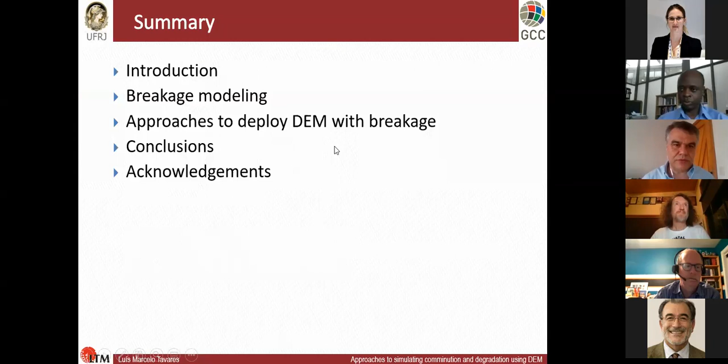I think in this crowd there's definitely very little doubt that people recognize DEM did a fantastic work for us in process industries. I'd say it definitely allowed us to open the black box. Before we couldn't look inside the machine, now we can look, at least in the virtual machine, at what's going on there. And I think DEM, over these last 30 years, has evolved to a level where you can choose whatever platform you want, open source or commercial packages.

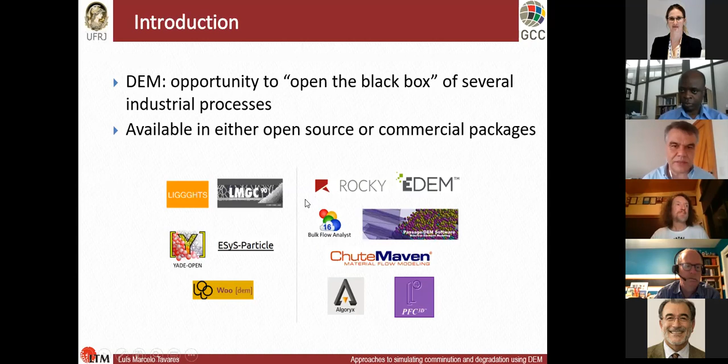There's plenty out there, as well as some in-house codes. Indeed, when you look at some things such as chute design during materials handling, or maybe closer to home, mill liner design considering projection of charge, there is little doubt that DEM is already an engineering tool. A lot of those are designed every day throughout the world and checked using DEM just to make sure things are already functional. So we want to go to this level in comminution and degradation during handling, but it's still something that is work in progress. We still are working towards this direction, and the challenge, I believe, is the difficulty of describing breakage in the DEM environment, as we will discuss during this presentation.

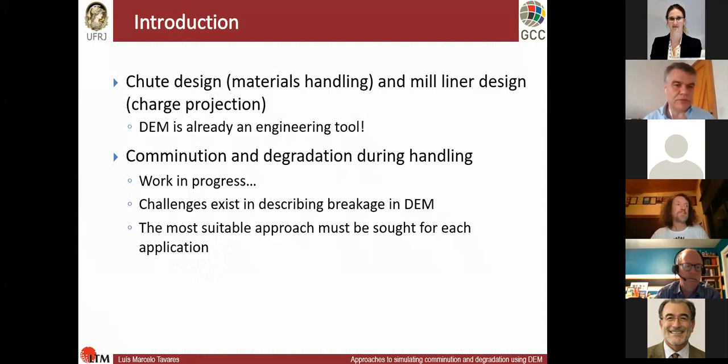So my provocation here is that, in order to do this, we have to look very carefully at what is the best way to couple these technologies, these tools, together.

So breakage modeling, as Malcolm introduced, is in my opinion quite at the heart of the success of this venture. There's no shortage of breakage models or breakage equations in the literature. Over 100 years of research on that.

Our vision is that the only sustainable way to really couple breakage to DEM is to look at individuals, understand what happens at each individual particle. It's really the best way to use DEM, because indeed the best thing we can do with DEM is actually describe not averages but individuals, and that applies to the environment, to the machine, to the device, but also to the particles.

There's little sense in actually using the richness of information from DEM if you're just relying on average characteristics of particles and tracking averages of the population. The nice thing here is to be able to have as much information about both.

In order to do a good job coupling DEM and breakage models, I think some requirements are important. In my opinion, the models should be detailed enough to describe breakage, but they shouldn't be overly complex. We should remember there's little success in describing fantastically well a single particle if you cannot really put hundreds, thousands, even millions of particles in your simulation. So you have to avoid too much complexity or computing effort.

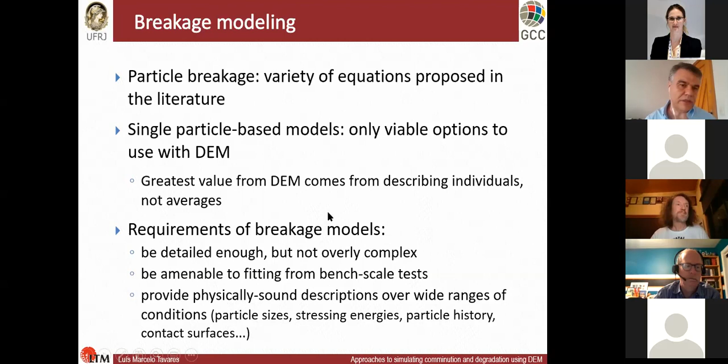Particle history is important here, being able to keep track of what's going on with the particle, and also the fact that sometimes particles hit each other, sometimes they hit different surfaces, and that surface, as far as comminution is concerned, will have a major role. So these are all things I think are key in being able to successfully model breakage.

Over 25 years ago, I started at University of Utah, and as part of my PhD, some really good work was being done there. I pretty much hijacked some of that to Rio when I started 23 years ago in Rio.

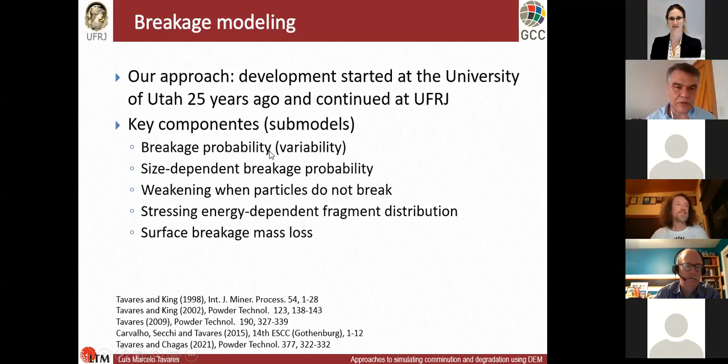The idea is that I started building the blocks of each of the components I thought were important to be able to describe breakage, from individual particles to an environment. I call these submodels, and we've been busy publishing and validating each of these using data from testing. So I'll go through each of these in a little more detail in the next slide.

The second part of the story is if you look at the breakage median value, that's the 50% probability value, the specific energy required to do that, which is the fracture energy or median fracture energy. If you look at how this value changes with particle size, it changes in a very particular way for each material.

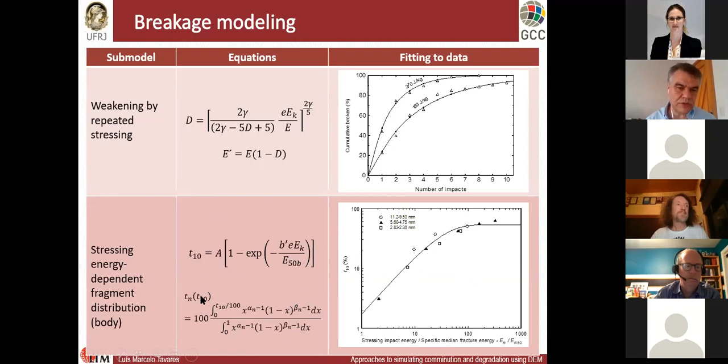On top of that, we create the full size distribution from each event using the incomplete beta function, which also served us well. The very last piece of the puzzle to describe what's going on with a particle in every single event is the surface breakage mass loss, or attrition loss.

It's described using this simple expression, where the amount of material lost is a function of a material parameter, particle size, and the specific impact energy.

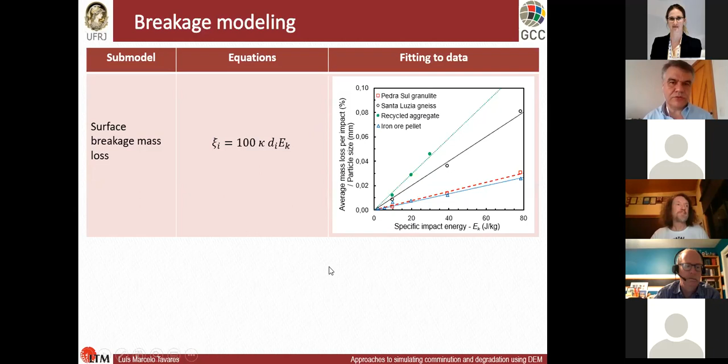This model area is very tough to deal with — surface breakage, attrition, chipping — and we know it's very dependent on particle shape and so on. I'd say that amongst all the models, this is the latest and most immature, but it still contributes to explaining what's going on with particles under very low stressing conditions.

How do we go about defining constants in those equations and fitting parameters in those single particle models? The most favored approach is to look at single particle breakage tests. You can see here the impact load cell device originally proposed at the University of Utah.

There's a number of these around the world — here in Rio, at the JK, in Iran, and other places. This is nice when you want to reproduce conditions found in most comminution machines, at low to relatively medium velocities.

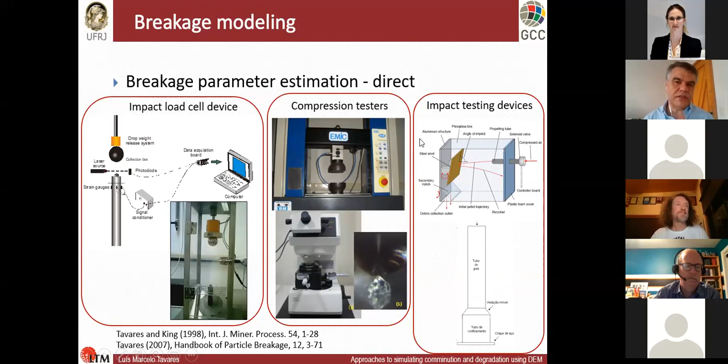If you're dealing with conditions like impact crushing, or want to mimic what happens during ship loading or materials handling, you can use one of many impact testing systems, propelling particles against a target at different angles and analyzing the debris, counting the number of broken particles. In materials handling, some materials are quite brittle, so you can even do simple drop-by-gravity tests and analyze the results. There's a number of direct ways to measure those parameters.

But in some conditions we have to rely on indirect measurements. For instance, Grant and Malcolm did some very nice work a few years back using Erlang's Schönert's impact device, as well as JKRBT, to generate data describing how a particle's response varies over quite a range of particle sizes. Using data they generated and our modeling approach, we could demonstrate that we could fit the data very nicely over quite a range of different sizes.

The key part of our model is exactly how the median fracture energy changes with particle size.

Another, more indirect approach is to use batch grinding tests we do in the lab, either in a ball mill or a stirred mill, and then rely on the validity of the batch grinding mechanistic model I'll show in a few minutes. We can back-calculate some of the material characteristics. In this case, this is the limestone data. We've been publishing on this, demonstrating that, within the limitations, it is a valid approach, but it's a way to still get meaningful model breakage parameters to use in the different downstream approaches.

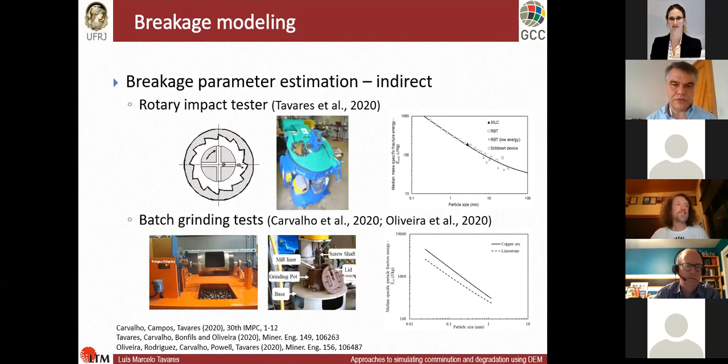But it's important to bear in mind that the model has limitations. Some of these relate to strain rate effects. We know some materials exhibit strain rate effects, and we still don't quite fully understand the relationship between material composition, texture, and strain rate effects. So that's not explicitly in the model. What we suggest is to do testing under conditions closer to your device and strain rate range. The other thing is particle shape.

We know particle shape has a very significant effect on breakage. So far we assume particles tested have the same shape range you see in practice, but this really imposes a challenge in particle preparation during testing. That's an area that can benefit from further research in breakage modeling.

Loading mode also matters for some materials - whether you're stressed by hitting against a target, or loaded like in two-point compression, there are differences. These aren't quite clear in the literature, so our model is insensitive to that. That's another area. And also composite particles.

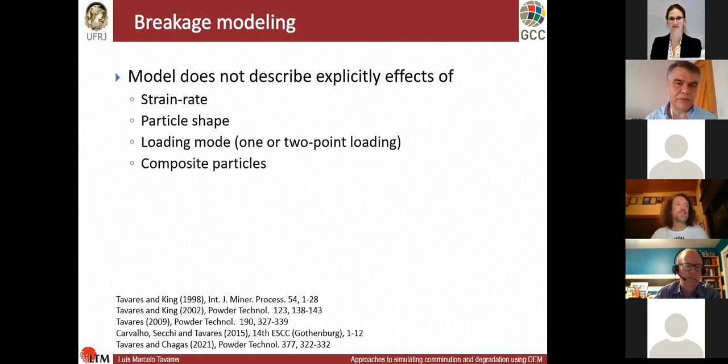We assume particles have their variability, but we don't really know exactly which component inside the particle is responsible for the strength and so on. So the behavior of composite particles is something we don't yet understand, but it's really key in liberation. Bearing those limitations in mind, we still thought that now we have a model good enough to do some good work for us in degradation during handling and comminution.

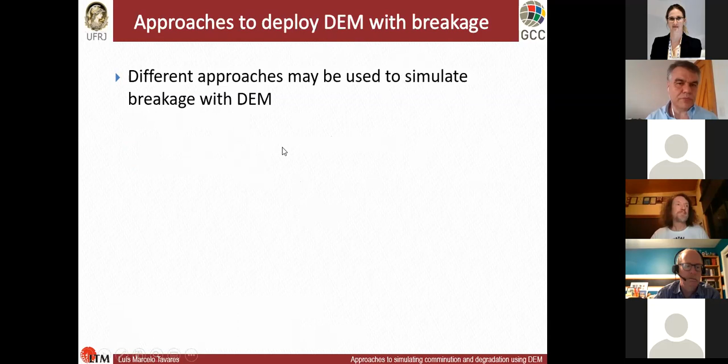So we want to deploy this breakage model in simulation. How do we do that? To illustrate, I'd like to show this table with, in my opinion, at least four different approaches we can use. We'll go through it in the next few minutes.

The first approach is to break particles in DEM using collision history information. This is the simplest approach - you consider the discrete particles, track the individual particles, and predict what happens to each one. Basically it's a post-processing of information from DEM that we use to get the collision history.

And then afterwards we predict what happens with the breakage. The other approach, also looking at discrete particles, and the most intuitive one, is the breakage embedded in DEM.

So DEM in this case encompasses what is going on throughout the whole process. It's used to calculate the stressing energies, describe each collision, but also as soon as a particle breaks, it replaces it by fragments and so on. This is the one we'll talk about quite a bit.

The third approach goes into a continuous distribution. It recognizes that for some media mills, there's no use trying to describe each individual particle—you have billions and billions of particles. In this case, we want to use what we call one-way DEM-PBM coupling population balance model, which is basically running DEM simulations and then getting information on the collision spectra, typically of media mills.

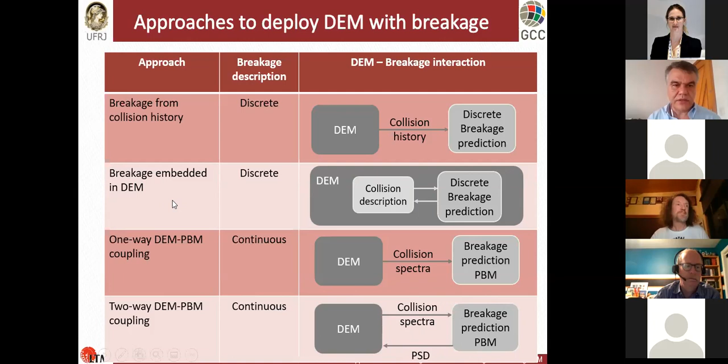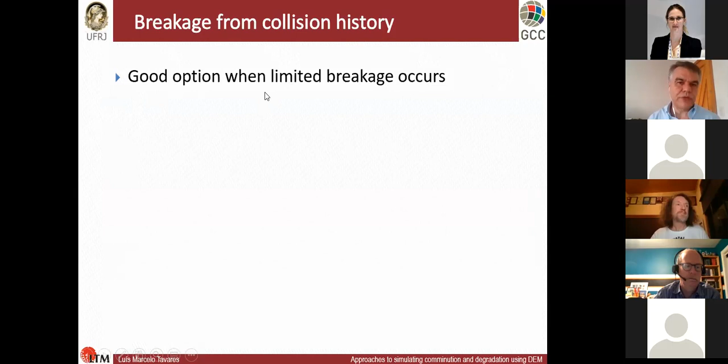So looking at the very first one: breakage from collision history. I think it's a very good option when you have very limited breakage in your process. Just explaining briefly, this would mean you run your DEM simulation assuming that particles don't break. It's the easiest way to go.

That's pretty much the standard outcome of a DEM simulation. But then you keep track of several particles looking at their collision history. Now with this information, after the simulation is finished, you can go to your own code and start to look at these histories of these virtual particles and understand what would happen as far as breakage if these particles would be simulated.

So in this case, for instance, the first outcome is: what if the stressing energy in one of those collisions is lower than the fracture energy of the particle? We know from our breakage models that the particle probably suffered surface breakage and may have been damaged. So there's mass loss here, fragments generated, also a reduction in fracture energy for the next time step or next event.

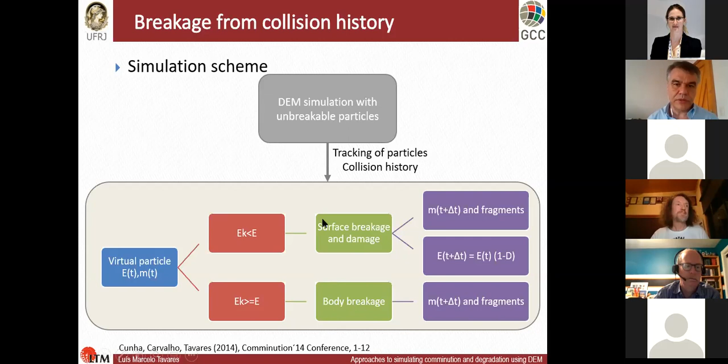Now you go to the next impact event on this same particle. Maybe the stressing energy is higher than the actual fracture energy of the particle. In this case, the model allows you to predict the body breakage and then the size distribution of the fragments. So it is, of course, a limited approach when you have a lot of breakage, because the simulation doesn't consider that particles would be broken. But it's really a very powerful scheme when you have fairly limited breakage.

So to illustrate this, pushing almost to the limit of the validity of this approach, we applied it to a VSI crusher in a particular application here in Brazil, producing artificial sand from crushed rock. So this is one VSI crusher.

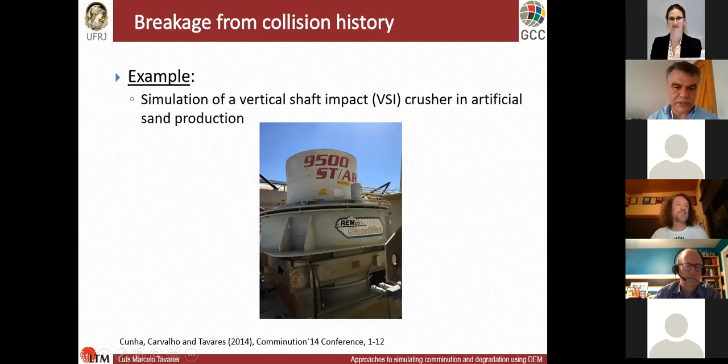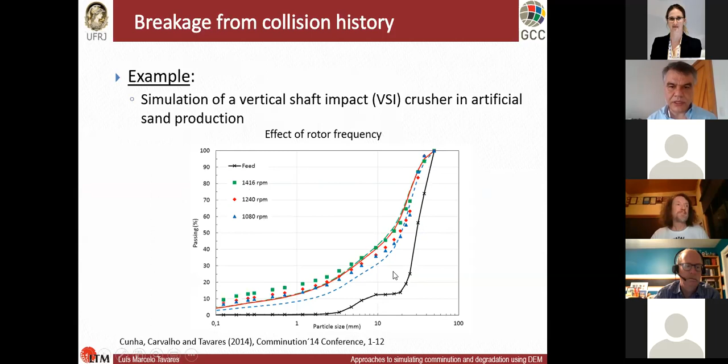What you can see here is the typical particle size distribution—the feed and the size distribution of the product, discharge of a full industrial crusher. You can see here the effect of increasing the rotor frequency from 1,000 to 1,400 RPM. And you can see the data points as well as the model are quite reasonable in the sense of increasing fineness as you increase the vigor of the impact.

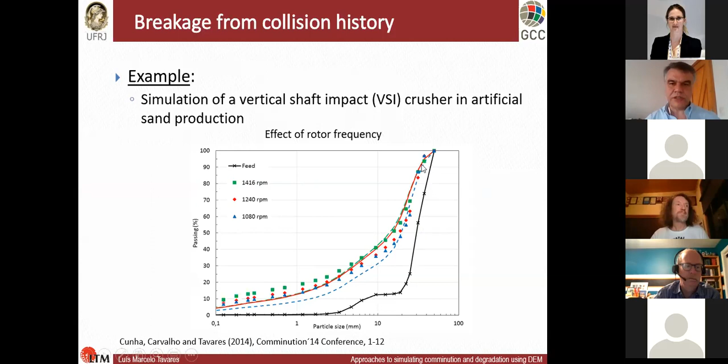And also showing here the typical thing we see in VSI, that a lot of particles actually barely break. This size reduction is certainly the smallest amongst all comminution equipment. So it is, of course, just at the limit of applicability of this approach, but still served us well in a simulation involving millions of particles, as you saw. So this is one approach that could be considered. Indeed, as a limitation, it really provides an unrealistic description if particles suffer multiple breakage or severe body breakage events.

And the other thing is, of course, it's not packaged anywhere, so you really have to build your own code or look for somebody to do that for you. But it's important that we've been very successful simulating materials handling operations using this tool, because when you do materials handling, especially loading in a silo or loading in a blast furnace, you can have millions and millions of particles. It'd be a lot of effort to actually predict breakage in real time with DEM there, putting a lot of overhead in your simulation. So one thing you could do is just run the simulation as you would without breakage, and then look at a few tracked particles to see what happens. This has been very useful for materials handling and a number of applications.

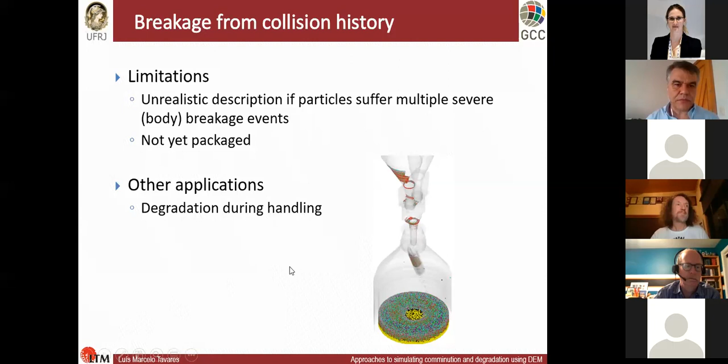Well, of course, the most intuitive approach when you're talking about coupling breakage in DEM is actually putting particles breaking in real time inside the DEM environment. And indeed, I think that's the only option you should consider if you are predicting a crusher with flow restrictions, like a compression crusher, jaw crusher, or cone crusher. In that case, there are a couple of options you should consider. We are quite familiar with some of them. For instance, we can deploy this breakage with at least two major types of approaches.

The first one is the approach in which the fragments are resolved throughout the whole simulation, so I call this the fully resolved fragment approach, as you can see in the scheme on the right. For instance, for the bonded particle model, the fragments exist from the first moment you start the simulation. So you can appreciate that the amount of energy, time and effort in the computer there is quite significant, because you have to keep track of every individual fragment even before they are actually created in the simulation.

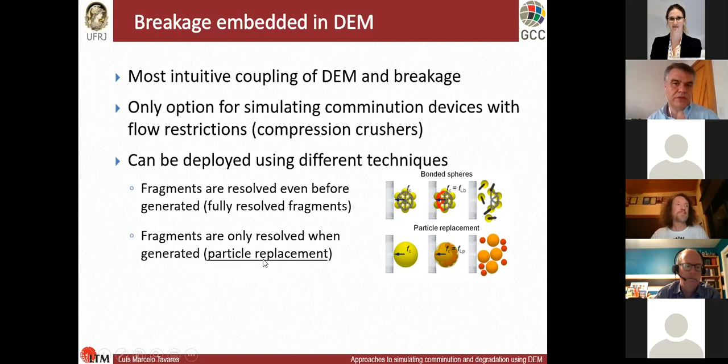And then there's what we call particle replacement, schematically shown here on the right. You only care about the fragments when they are actually created. This is exactly the approach that we favor, because it's more amenable to be deployed with large simulations. So this instantaneous breakage approach is one where fragments only appear when you need them, and the particle is replaced by the fragments only when a given criterion is met. As I mentioned, it's far less computationally intensive than the other alternatives, which is why we pursue that path.

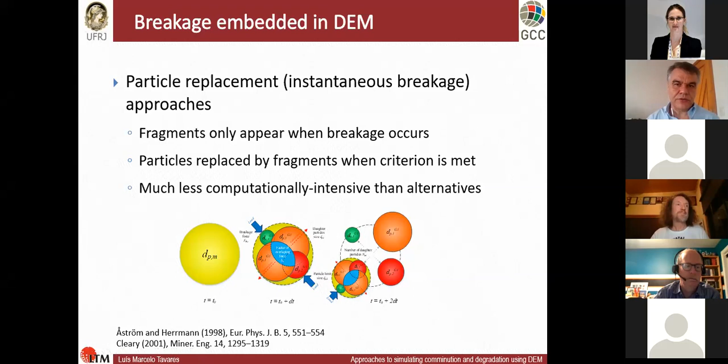So what did we do? We were quite happy with the approaches we put together, and we were very happy to be approached by the two major software developers for commercial DEM - Rocky, ESSS, and DEM Solutions, now Altair - who wanted to have our model input into their platform. More than a year ago, we input into Rocky the version for polyhedral particles, and in EDEM we just recently input the version for spherical particles. So both are working already if you have licenses for either one.

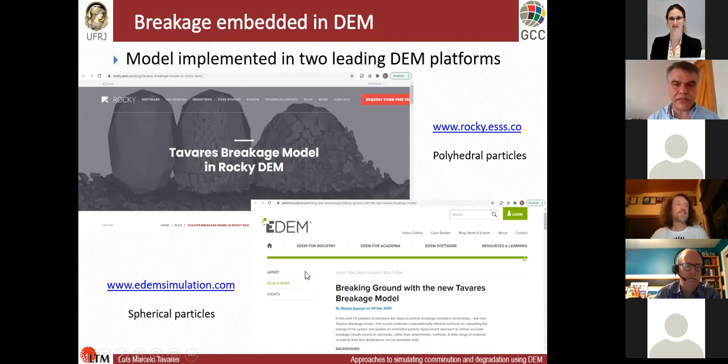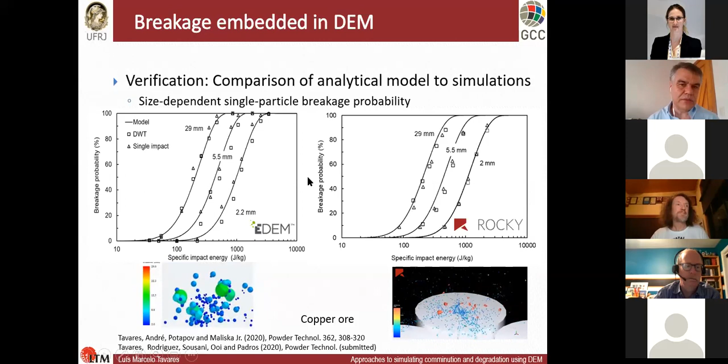You can see the illustration here - that's in EDEM for spherical particles, and on the right you see exactly the same thing for polyhedra. Sometimes a small effect from single to double impact appears, but that's not really accounted for in the model. The second part of the puzzle here refers to the weakening, which is basically accounting for the fact that particles, when they're hit over and over again, become progressively weaker.

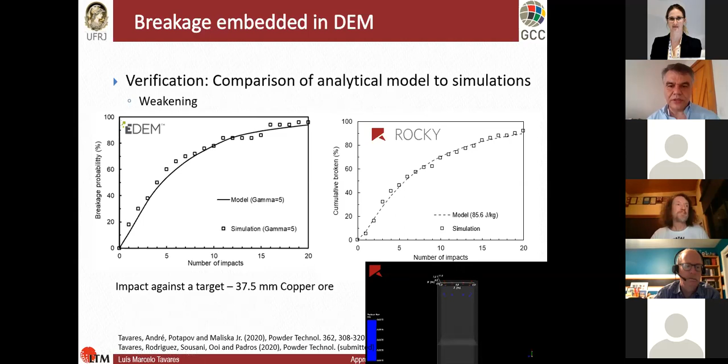Even at the same stressing energy, particles eventually break at a very low impact energy. This is characterized by a single model parameter, gamma. You can see here, both in EDEM and Rocky, that it really captures nicely the progression of particle breakage. Here on the bottom, you can see a simulation in Rocky showing the progressive breakage of particles when they're hit, leading them to drop.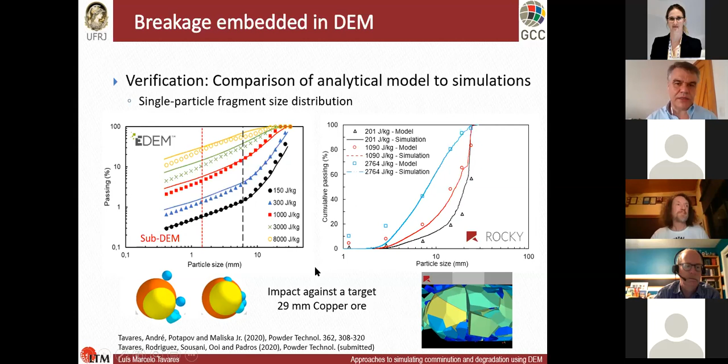This gives us a lot of confidence that we can do a good job starting to apply to real situations in comminution. Perhaps the simplest situation we can find in comminution is just dropping a particle on a bed, a steel ball on a monolayer bed of copper ores. You can see here, this on the left is just a comparison now, symbols represent the experimental data and the lines the simulation.

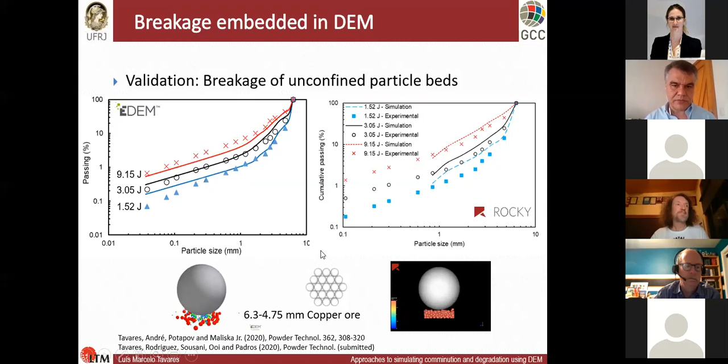This shows very nicely that increasing the impact energy of this ball, typically by raising it to a higher height, increases the fineness. So qualitatively and quantitatively, giving a very nice fit here for EDEM and also for Rocky. They also pay attention to the fact that in EDEM, we could stand quite a lot below the minimum size of the fragment, which in this case is about 0.8 millimeters. This gives us some good high expectations when we apply to larger scale systems.

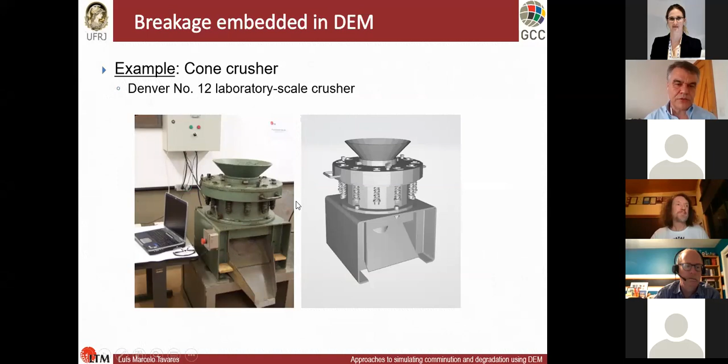Just a couple of examples here. Very recently, we have been running some of these simulations. This is a Denver type cone crusher we have in our lab. We have tested quite a few materials, so we ran simulations, for instance, for a copper ore here in the 22 to 16 millimeter size.

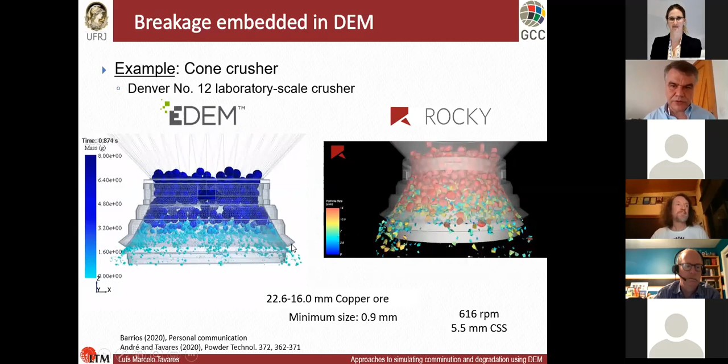We ran simulations now in EDEM using spheres, and in Rocky using polyhedra. The speed of simulation is quite different here, almost real time in Rocky, but quite slowed down in EDEM. Nevertheless, you can see very nicely the choke level being identified here, and then the fines leaving the machine. It looks quite lifelike what we have.

But more exciting even than in EDEM is the fact that we can actually predict the size distribution even well below the minimum size of particle that appears in the simulation, which you see here in the solid red line, in contrast to the size distribution measured from the test. This gives us confidence that in crushing, we can apply to some really interesting case studies.

We have done some industrial ones, but we didn't get clearance to present today.

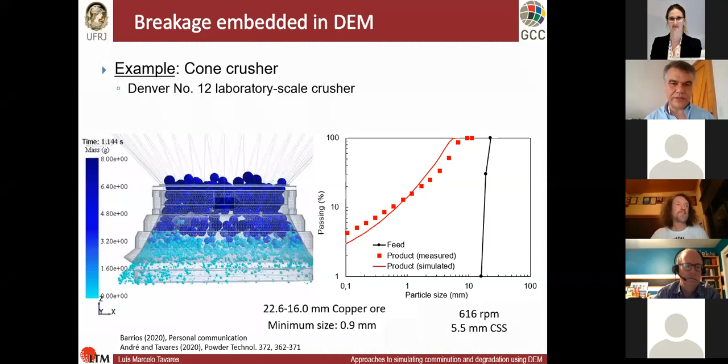So maybe the most challenging crusher type machine would be the HPGR. Quite a few of us are involved in that. The HPGR has the added complexity that you have one roll that is fixed, whereas the other one is movable and responds to the stresses in the bed.

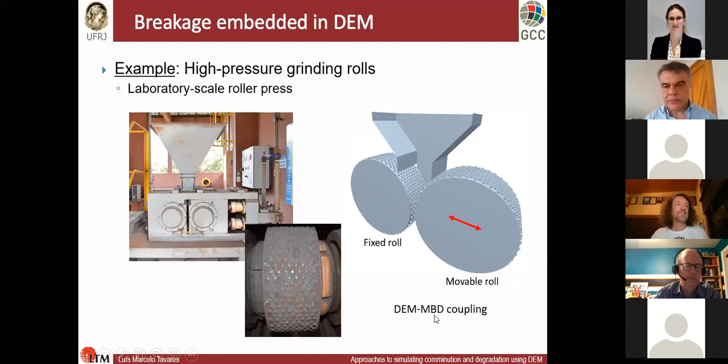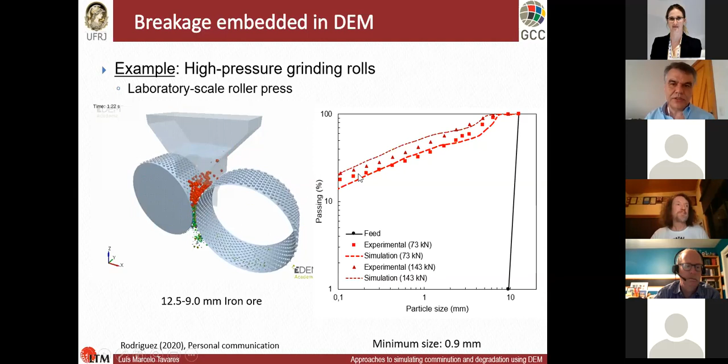But when you look at size distribution, I think it's quite exciting to see that when we raise the force from 73 kilonewtons to 143 in this small lab machine, we see an increase in fineness of the product, as is typical in HPGR, a lot of fines. The nice thing is that we could capture the increase in fineness in the simulation, given by the lines. So we're very excited to see the simulation telling us what we do see in an experiment in the lab.

Of course, there are still limitations to that. We're still in the early stages. For instance, particle shape, we know that influences breakage. Even though we could tailor-make the shape of a particle in Rocky, we have no control over the shape of fragments. So this is still an area that has to be addressed in the future. And of course, when we deal with spheres, there's no control whatsoever in that.

It's important to recognize that when you have major rebreakage going on, simulations will obviously require inputting very fine particles. So the tricks we use to generate the fines no longer become applicable, because those fines would have been broken over and over again.

One area for those who are very excited about DEM that is really worth looking at: when you talk about contact parameters, we mostly look at how unbreakable particles behave. But in comminution systems, particles change their size naturally, and so their flow properties will change. So we have to be a bit more careful than usual in selecting proper contact parameters.

Of course, this hasn't limited us to apply to comminution machines. We've been doing work on impact crushers, jaw crushers, roll crushers, and so on. And the most exciting thing, I'd say, is being able to go to novel crushing devices and test machines for things that aren't even in operation yet.

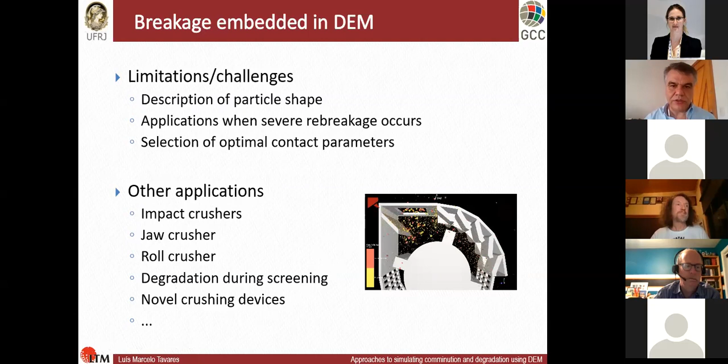So this is the first part, dealing with explicit particles, individual particles in a DEM simulation. But how do we go about simulating tumbling mills? Tumbling mills involve huge particle populations.

Just to illustrate how massive that is in a DEM simulation: for different mill types and diameters, starting from a 30 centimeter diameter mill, like a Bond mill, the number of particles you'd need to simulate the full mill is maybe a couple hundred, pretty straightforward. But as you increase the mill size to full industrial scale, just simulating media, you're talking about a couple hundred thousand particles, which is quite doable these days in any open source DEM code. But if you want to start including particles, just in the case of the Bond test, besides the media, just the 2.8 millimeter particles, which isn't a lot in a Bond test, you already increase the number of particles you have to deal with by two orders of magnitude.

If you're even greedier than that, including 0.5 millimeter particles and so on, you're definitely going into the billions and trillions of particles, which won't be feasible to simulate for quite a while, I believe. And this is only talking about particles that don't break. If you talk about breakage of these particles, it completely goes out of control.

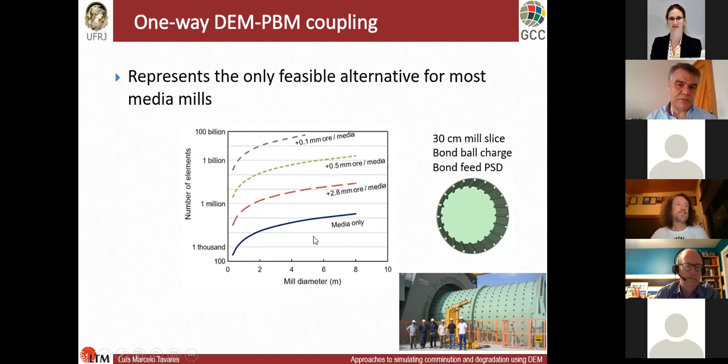So it really means that we need to, as much as possible, remain looking at how media behaves, because it's still doable, and be smart about coupling with breakage. We have to understand that to apply this, we must consider that only grinding media is transferring energy. But it's important to also realize that we should assume particles don't really create a lot of swelling in the ball charge. That applies if the particle size distribution is not too coarse.

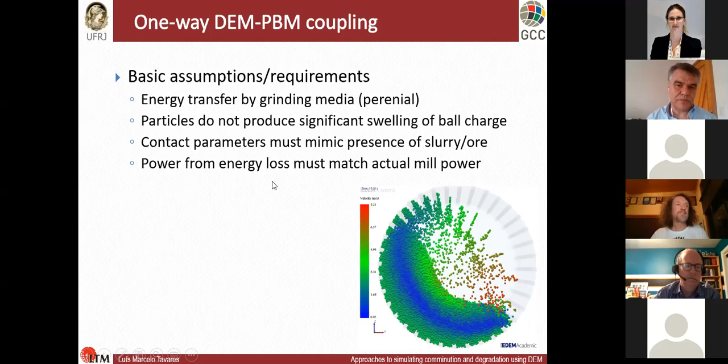It's important to also realize that the contact parameter selection is key here. We must be able to mimic with the contact parameters the presence of slurry or ore, and that really is different from the contact, for instance, for steel on steel. One of the resources we have to make sure we are in the realm of reality: we should be able to match the actual power in the machine with the power we simulate in the DEM, summing up the energy loss.

So with those caution notes, we have applied the scheme, which is slightly different from what you saw before. Now it's in a continuum. We use DEM simulation to get the collision energy spectrum, so we have data over quite a range of stressing energies. We have the same models we saw before giving a description of the micro scale events, but then it requires us to understand what happens between those grinding media collisions.

How much material is being captured? What is the size distribution of those particles? This lets us finally put in the population balance approach and what we call the fracture energy convolution, which accounts for the fact that when you hit particles, some of the weaker particles are broken, some of the tougher particles are weakened. So we have to mathematically account for all of those events.

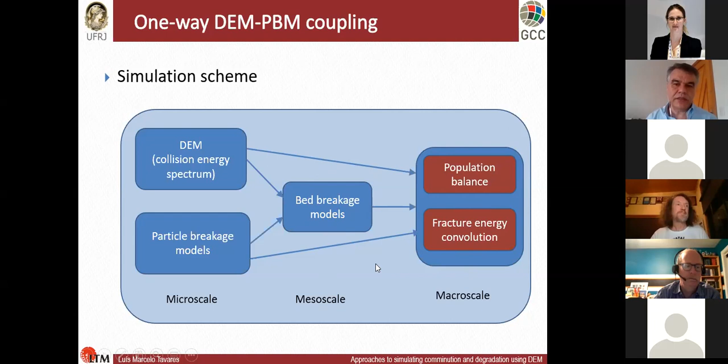Just for you to appreciate how this population balance formulation looks, if it's batch grinding, it looks more or less like this: the rate of change of particles in each class is a function of the frequency of the collisions from DEM, the mass of particles inside the mill, but also of disappearance and appearance components, accounting for both body breakage and surface breakage.

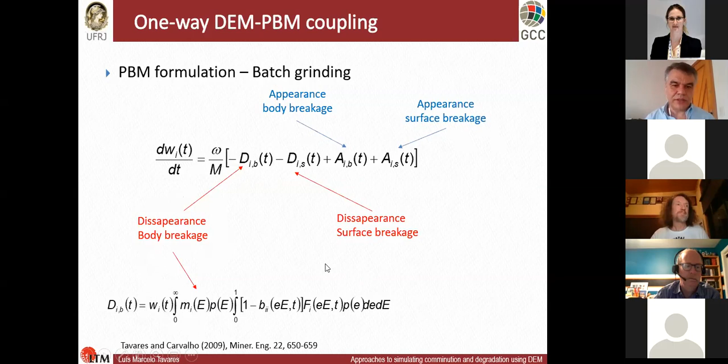Just for you to appreciate the level of complexity of what I'm talking about, we have to account in each of these terms for all of those micro processes: the amount of material captured, the frequency of collisions of a given magnitude, and the probability distribution or fracture energy distribution of material. So it's a lot of background modeling that goes in there to put these together in a continuum.

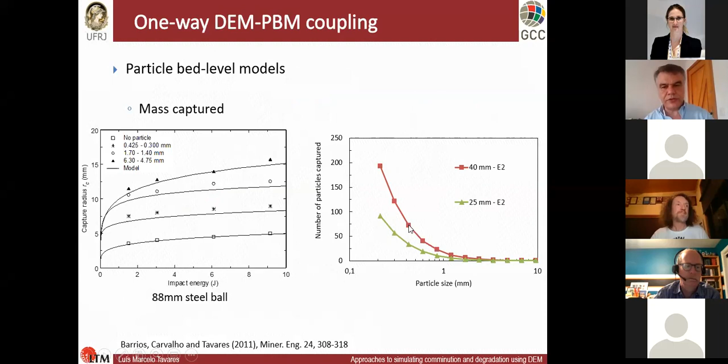One part of the model that I think is quite important is this mass capture. You can see that the amount of material captured in our model is a function of the diameter of the ball and the particle size, which gives us something we know: if you increase the ball size, you capture more material, but of course you have fewer balls for the same grinding charge. So these are all the pieces of the puzzle that we put together.

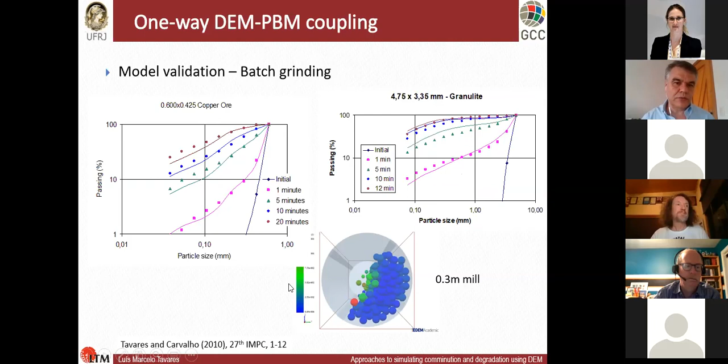We did validation on these some years ago, on different grinding conditions in batch mode, from fairly fine copper ore to relatively coarse rock. Fairly good agreement here, though in some cases it's not as good because we have difficulty getting good breakage parameters for the fines and so on.

But I think one way to show the validity of this approach is to show that it responds sensibly to variables we know are important in milling. For instance, the surface breakage rate: we know that if you use large balls, like 40 millimeter balls, in a small mill, the rates of breakage are quite low for fine particles, but you get the bonus of breaking the coarse material. If you move to smaller balls, like 15 millimeter balls, you definitely sacrifice breakage of the coarse in favor of being able to break fines much more efficiently.

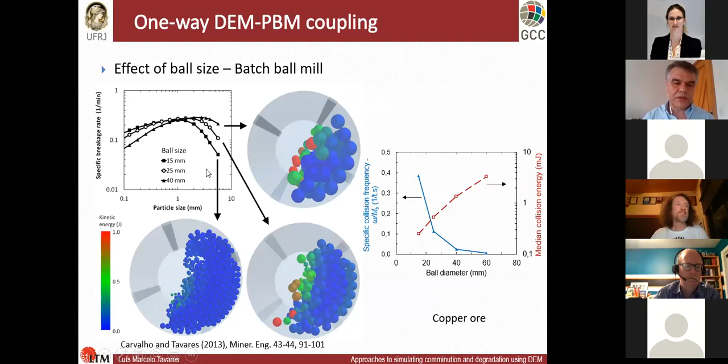This is a very nice material-dependent response that the model is already capturing nicely. Now going to other mill types, like a stirred mill or vertimill type machine, we know well that increasing the frequency of collisions increases the energy. But here in the model, you can see nicely that the specific breakage rates shift upwards as you do that, from prediction using a model. So this is something we're very excited about, the ability to represent what we've seen through experiments using the mechanistic model.

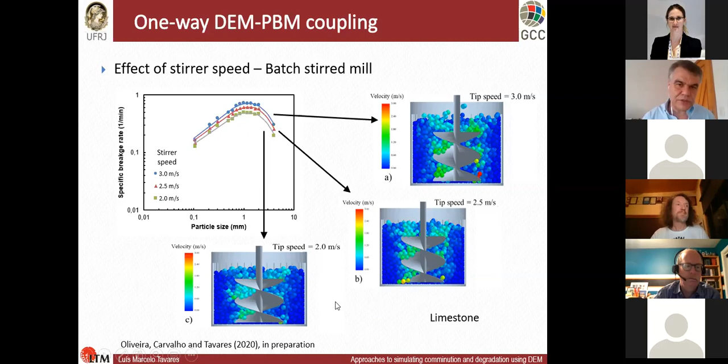In industry, we don't operate things batch, they are continuous. If you want the full dynamic solution, it gets quite complex, with major integral differential equations. But we wanted a simpler solution. So instead of looking at dynamics, looking at steady state, we could use a simpler solution using batch grinding data as well as residence time distribution.

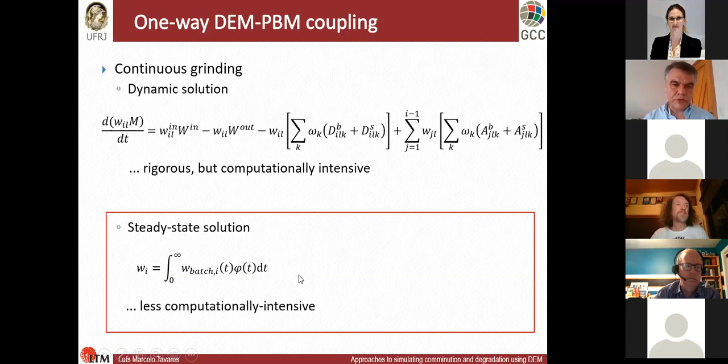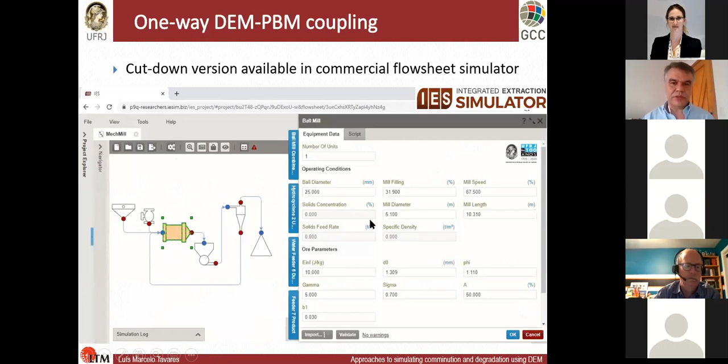Using this solution, we could go into a commercial simulation platform, which has been a dream of ours for a long time, to put a DEM-based breakage model into a simulator. This we have done in IES. You can see here our ball mill model with the classifier, and then you can use it to predict in IES in any circuit you like.

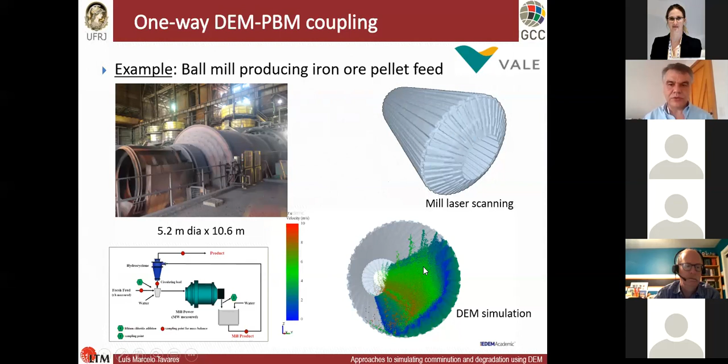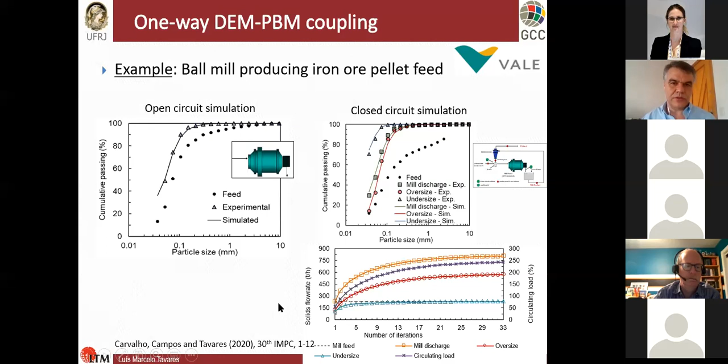It takes a while to solve all those equations, but it converges and gives us the full circuit response. Of course, there are still limitations. We still know relatively little about the role of slurry, especially on breakage and particle capture, so we still need to improve, especially on the capture model. And characterization at fine sizes is a key challenge we need to address to apply these approaches. But that hasn't prevented us from looking at different mill types: stirred mills, planetary, and so on.

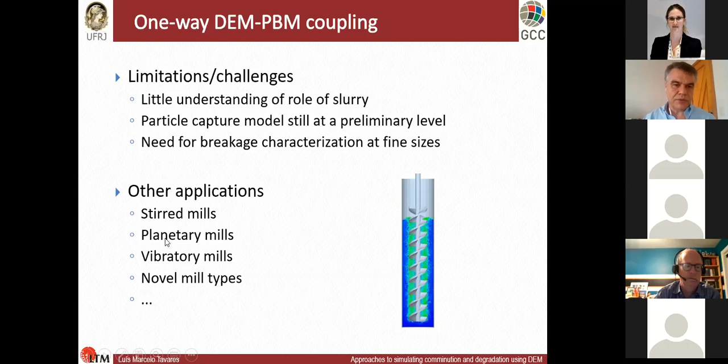The very final piece of the presentation is talking about this 2-way DEM-PBM coupling, because we do acknowledge that in some mills, for instance AG and SAG mills, the particles take an active role in energy transfer, so we cannot simply decouple the role of media and ore anymore. In this case, we could look at the approach of breaking particles inside DEM. We don't think that's an option for SAG mills, simply because it takes fairly long for the charge to stabilize. You're talking about a simulation that would have to take several minutes, and we still are running DEM simulations for seconds, not minutes, not hours at all.

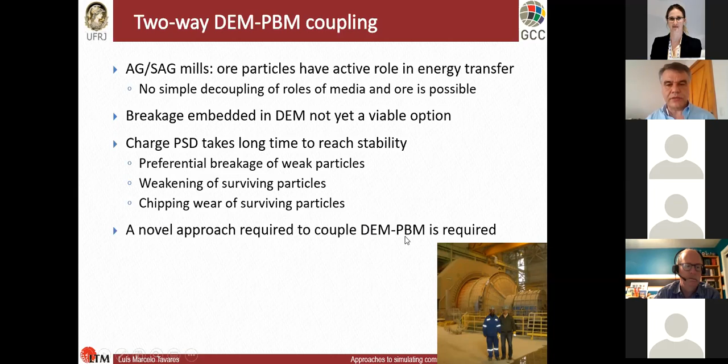So in order to do that, we need a new approach to couple DEM and population balance in a smart way. That was the PhD work of Rodrigo here from my group. The idea is essentially to start with the initial charge, doing a DEM simulation. After that, getting the collision energy spectrum, exactly as we do in ball mills, but then feeding it to a breakage model to predict if the charge has changed or not, or if only fines have been generated. If not much change has happened in the charge, you can just iterate the mechanistic mill model, assuming validity of the DEM simulation. On the other hand, as soon as the charge changes enough, you have to go back and redo a DEM simulation, and then go to the outside loop.

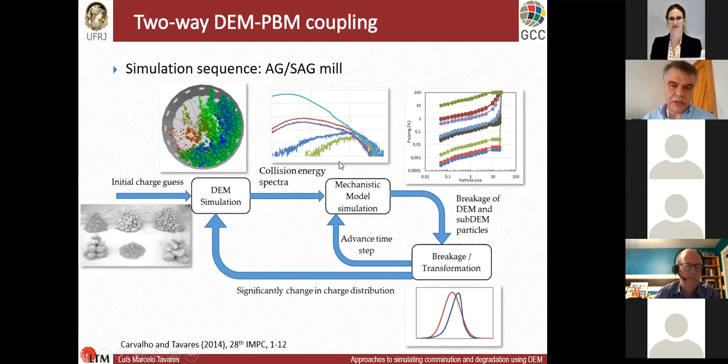We have done that for a couple of cases, but an important thing to recognize is that in a SAG or AG mill, you have the discharge grate that imposes a classifying effect. In this case, we have to use an assumed discharge function; we don't predict that.

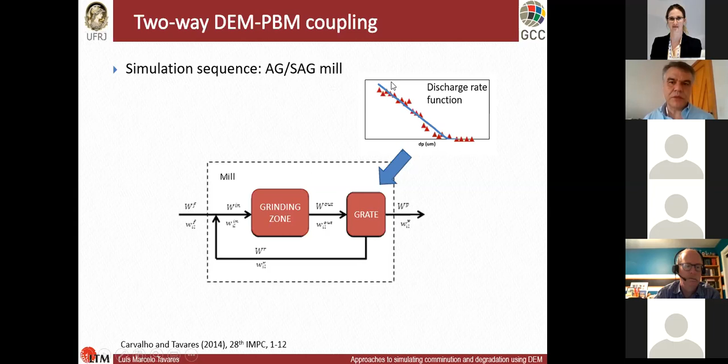It's from experiments or simulations using SPH that we need them, but we needed to assume that discharge function to be able to do the simulation.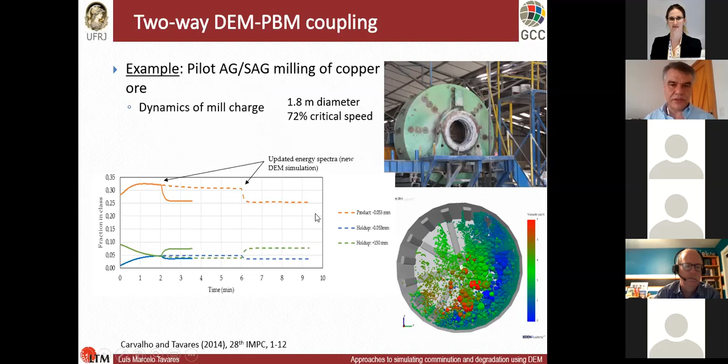So maybe after a few minutes, we could get full convergence, as you can see here. And the full convergence solutions are illustrated in this graph for the mill, the same conditions operating in SAG mode on the left and in AG mode on the right.

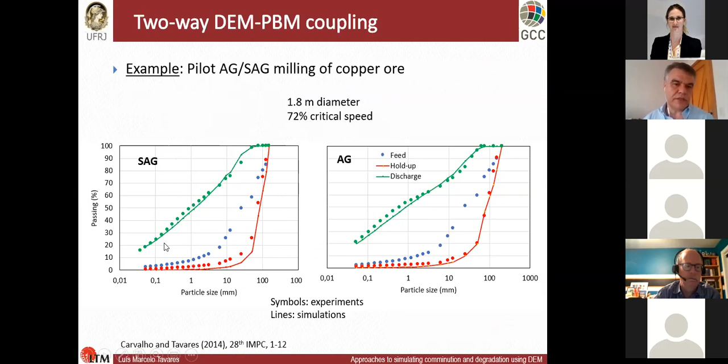You can very nicely see that the model could fit the data, predict the data. There's no fitting. And even further, showing that AG milling produced a bit more fines than SAG milling, as we already know from practice. So there's still a long way to go on this coupling approach.

It's still quite computation intensive. You require a discharge function, and it's not yet packaged. But there's definitely great opportunity to apply to pebble mills, run-of-mine mills, and so on.

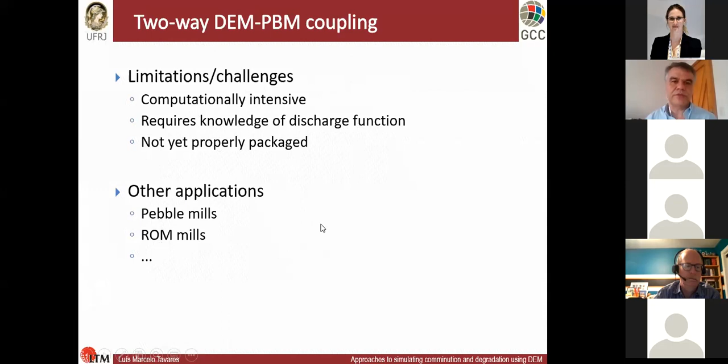So this really puts me into the final slide here. I think the take-home message I'd like you to take is that there's no one-size-fits-all solution to simulate comminution and degradation in DEM. You have to look for the best one.

And I think it's always good to remember that we're not in the animation business, and we should really seek the best fit for purpose solution, not the one that looks good, but one that works well.

I think breakage modeling has a central role in that. Our breakage model now is available in the major commercial DEM software platforms. We're very happy with that.

I think also we have been able to put our breakage model and the population balance model in IES to make room for more people to test the approach.

And as I said, I think AG and SAG mill still is a challenge, but I think that's probably one of the devices that can benefit the most from using this simulation, because the phenomenological models are definitely challenged if you have little data.

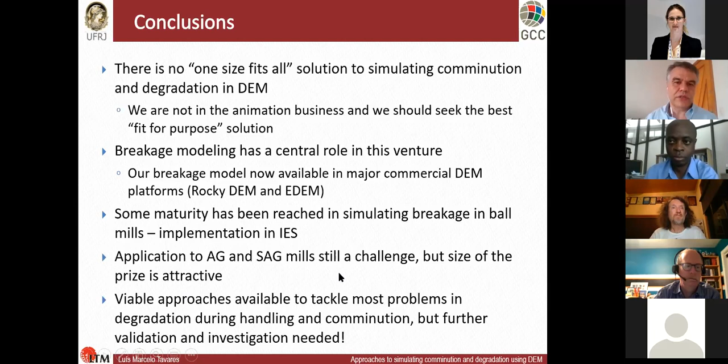And I think the final conclusion is that viable approaches are already available for most simple problems involving degradation during handling and comminution, but there's still work to be done in order to really make them a truly engineering tool. So I'd like to thank my whole team for all the background work, fantastic work done over the several years here.